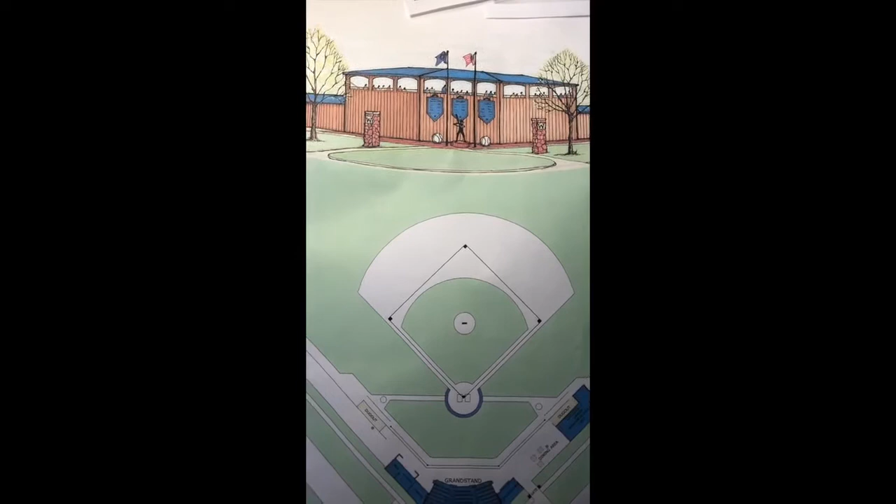Once I have a design, I need to convey that to the owner, so kind of get their approval to say, hey, do you like my design? This is a design sketch. I use floor plans, I use sketches, I use computer drawings. Here's a computer drawing of a daycare facility, and sometimes I just give somebody a nice little sketch like this. This is what your building could look like, with your design, and then I work closely with the client to determine if they want to go ahead with this, or if we need to go back and work on a different design, if they like this or not.

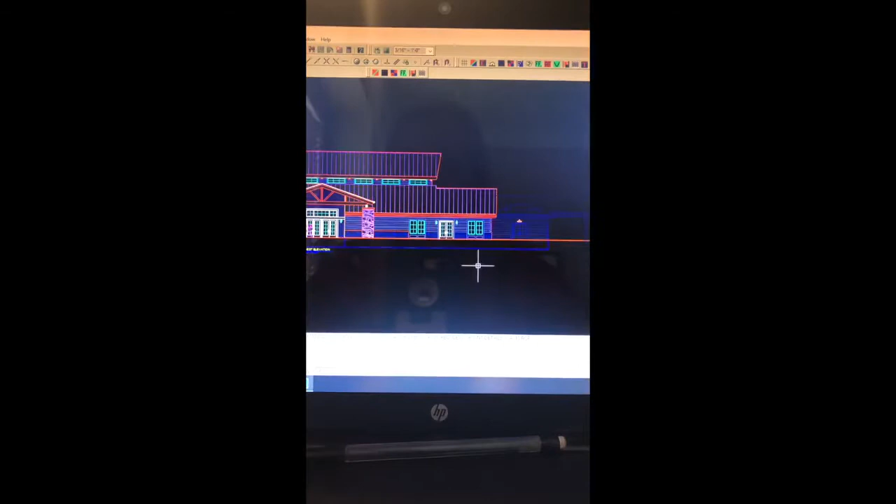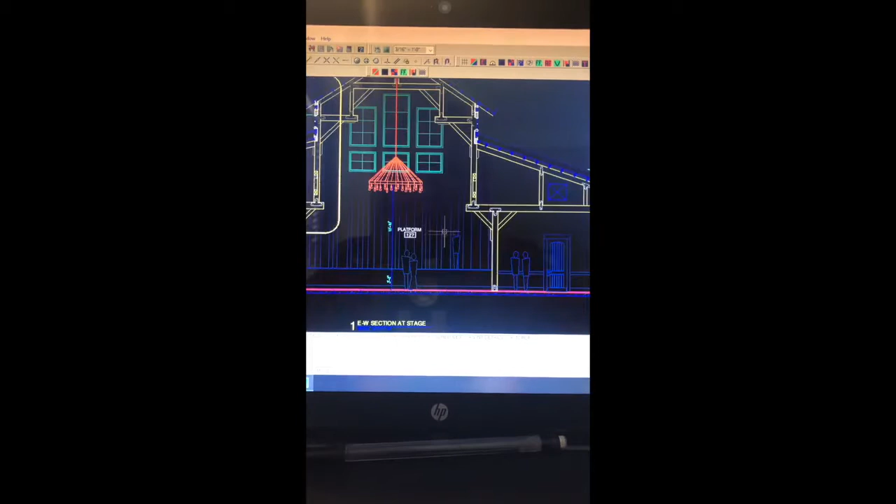Once I am done designing the building, then I will start to work on the construction documents. These are the plans for the building. It is really the instructions for the building so the contractor can know what to build. It shows how the building is laid out, the floor plan, how tall the building is, what type of roof is on there, the pitch of the roof, the materials used inside and out, whether it's stone or wood, size of the windows. Everything is detailed on these plans. Type of heating and cooling system, electrical, lighting. You can see the chandelier there in the ballroom.

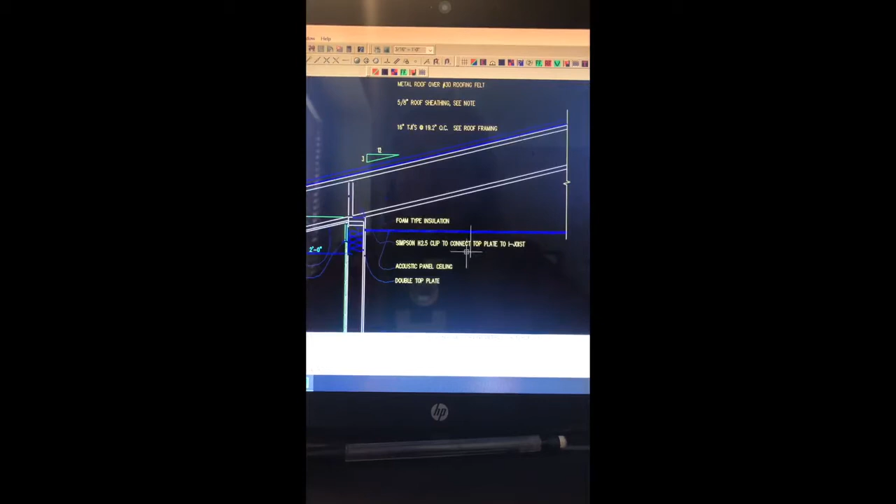Electrical, the lighting, how it sits on the site plan. Is it close to the road or is it set back? Is the parking in the front or is the parking in the back? Lighting for the exterior, lighting for the parking lot. Every detail is shown on these plans, and then how things get put together. What type of insulation to use. Here's a gutter and the roof. This is showing a door and dimension that I need to have for ADA clearance. Everything I put into this building is shown on these plans that the contractor gets.

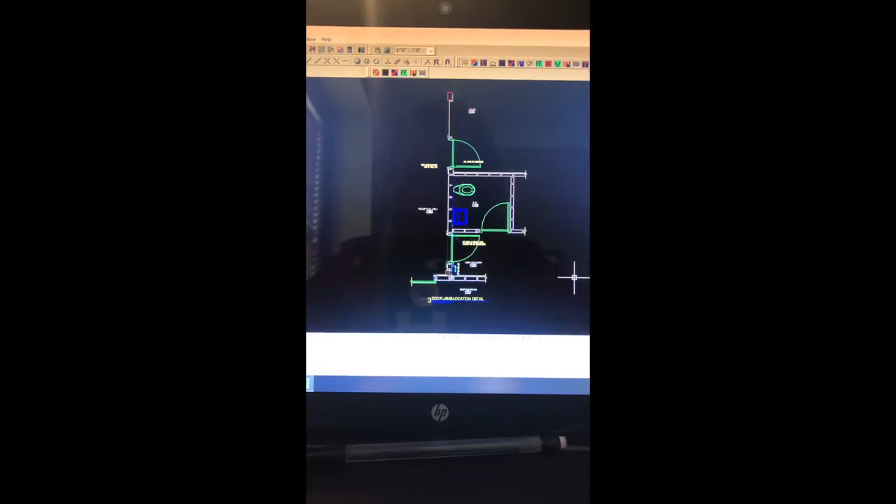I also need to research the codes. These are design laws for the buildings. We call them codes. So we have building codes that tell us how wide a corridor needs to be. We have building codes to help people escape in case there's a fire. We make sure that there are enough doors in each room. These are just a couple of my code books. We have codes that tell us how many plumbing fixtures need to be in a building, based upon the type of building. How many toilets for the men, how many toilets for the women.

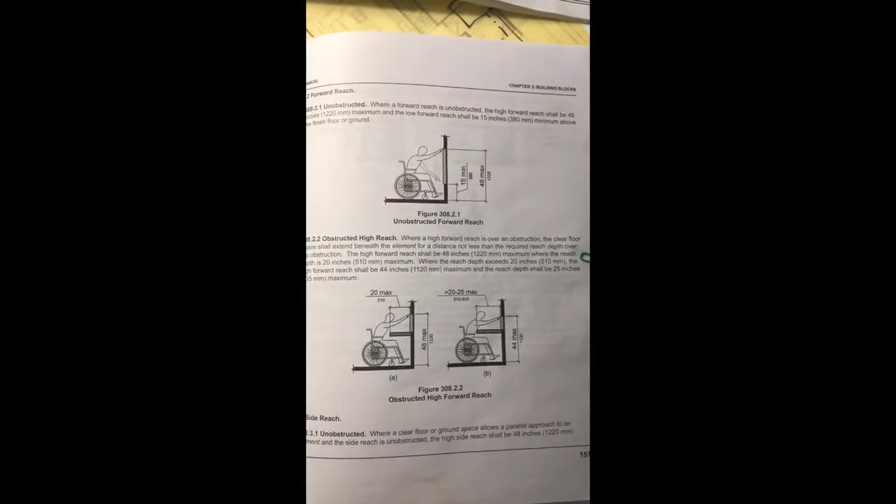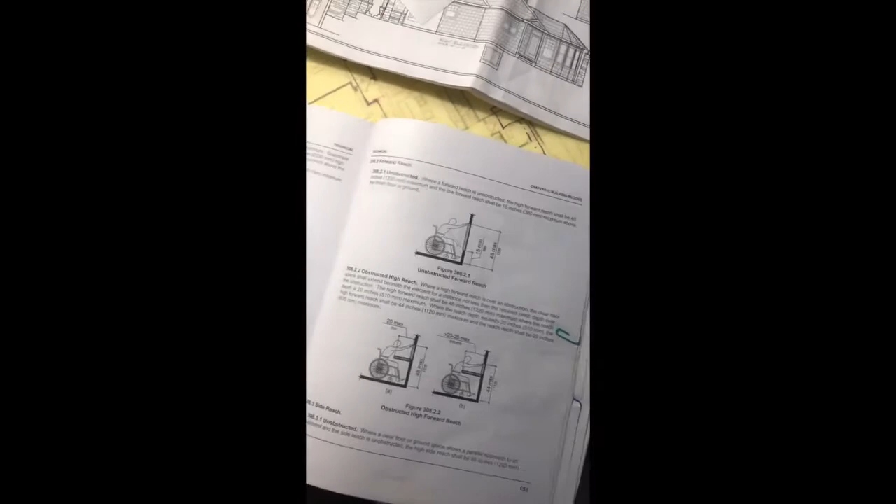Anyway, the Americans with Disabilities Act, you've probably heard of that. This is a code that I use quite extensively. Every building needs to be designed so that a person, whether they are hearing impaired, sight impaired, or physically impaired, can come in and use the building unaided. So it doesn't mean somebody can help them up.

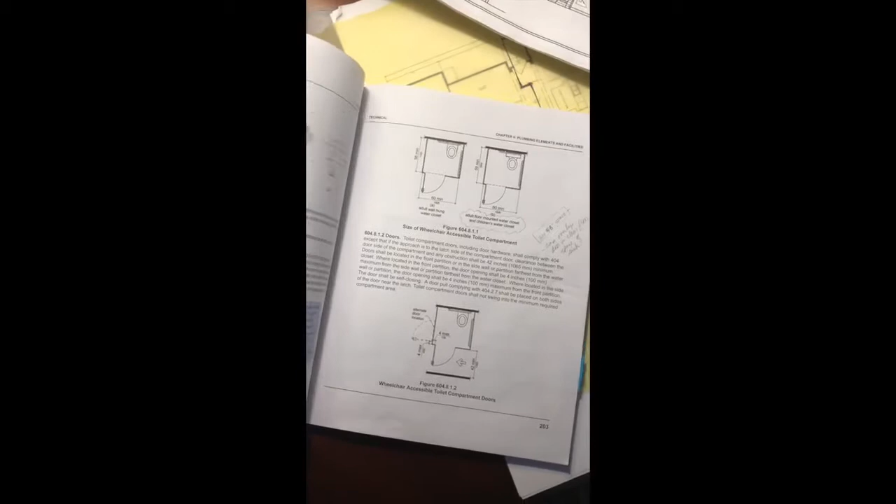No, they need to be able to get in and use the building by themselves and be able to get in it and use the restroom by themselves. How big, how high the countertops can be, how big the stall is for the restroom, how high that toilet paper holder is, how high the sink is, and the soap dispenser. So that's all in there, and it's something that I use a lot.

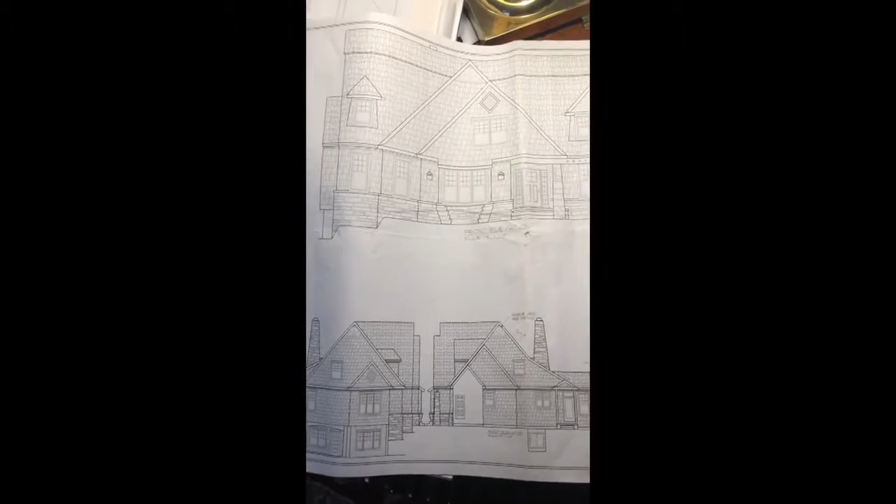Anyway, those are the construction documents that I use, and you'll see here I have a set of plans, and these are really the instructions that show the builder how to build the building. This is a project of mine. It is the Beaumont Event Center located just north of Wayne, and it was in what was a cornfield and a vacant site, and we built this new building. And off to the right is the Wayne Golf Course.

And I'm kind of excited about this because it's a great place for people to celebrate their weddings, and to think that I was the architect on this beautiful building, it's very exciting for me.

This next project is the Wayne Country Club. For this project, it was an addition onto their existing building. The existing building was the left half, and the right half of what you see there is new. But for my project, I wanted to make sure that you couldn't tell the old from the new. So on the outside, I had the roof match the existing roof. And I added new building materials to the outside so it all looked like it was one building. And I added that entrance canopy again.

And then as you go through here, this is what we call the light lock. This is where, once the movie starts, they close those curtains there. And then you can come and go without the light shining on the movie screen. See the movie screen ahead? And the light outside back there.

So if you were to open the doors without the light lock, the light would shine on the screen and everybody would be like, hey, close the door. That's why we have the light lock. The curtains go down. And then you can open the doors without letting all the light in.

On the inside, we remodeled it into one big theater. At one time, it was 2 movie theaters with small screens. Now it is a big screen, lots of seating, and you see those wall panels there? They are soundboard. They actually soak up the sound so it's not so loud and echoey in here.

And the lights on the side, I wanted them to be a wall wash, so they kind of just wash the wall and look nice. And when the movie trailer starts, you'll notice that those lights will go down to a certain level. And then when the movie starts, those lights dim down all the way.

There's an upper area here, it's a level area, it's not sloped, so they can have tables and chairs sitting out here. And it's very wheelchair friendly. Another thing we put in was some lighting in the aisles. Now that stays on the whole time, even when it's completely dark in here.